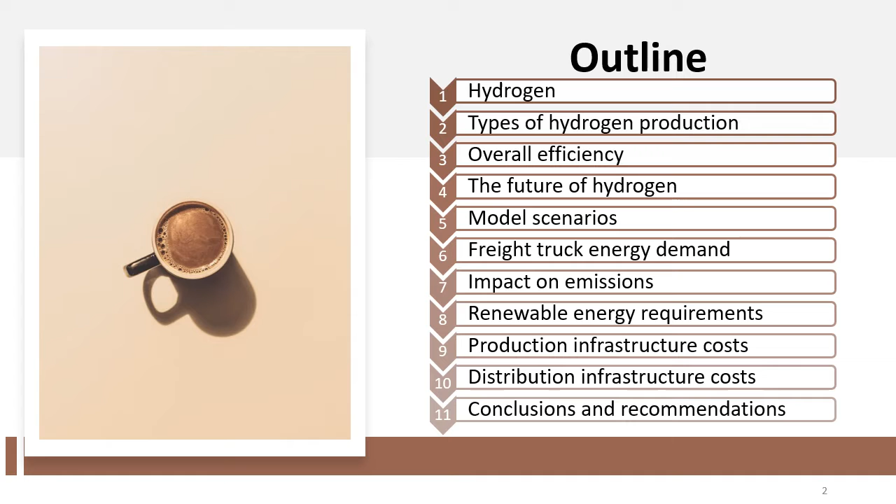Let's begin with some basic hydrogen background from an energy perspective. Hydrogen is a carbon-free energy carrier. It is 3 times more energy dense by weight than conventional hydrocarbons, but 4 times less energy dense by volume. It needs to be compressed to 790 times atmospheric pressure to have an energy usable volumetric density, which is an energy intensive exercise. It can be liquefied at negative 283 degrees Celsius at atmospheric pressure, which is an even greater energy intensive exercise. But most importantly, the production of hydrogen utilizes energy carriers as feedstocks.

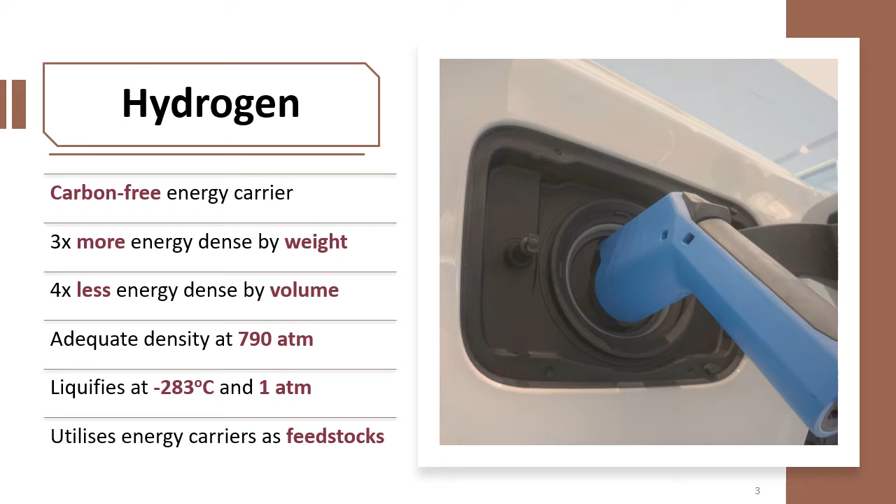Among the different types of hydrogen production methods are green hydrogen, produced by electrolysis using electricity from renewable sources; black hydrogen, extracted from natural gas using steam methane reforming; turquoise hydrogen, produced by the thermal splitting of methane; yellow hydrogen, produced by electrolysis using grid electricity; and brown hydrogen, produced by gasification using coal. For zero carbon emissions, the focus will therefore be on green hydrogen.

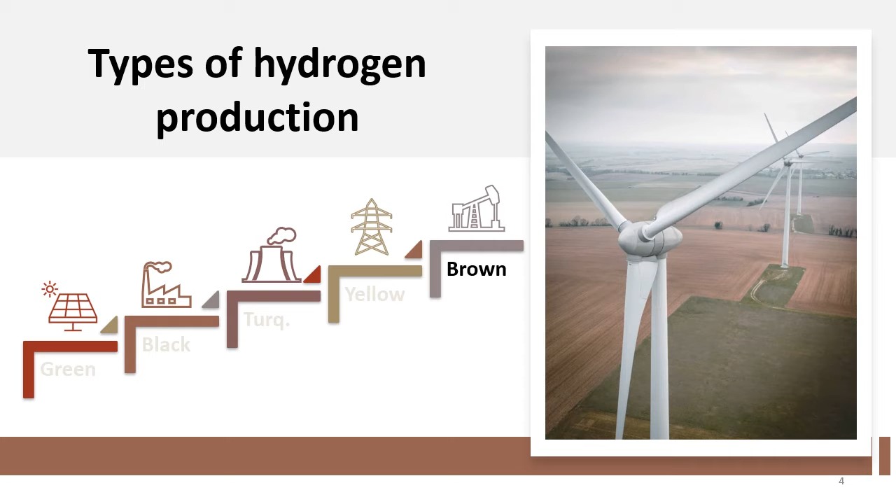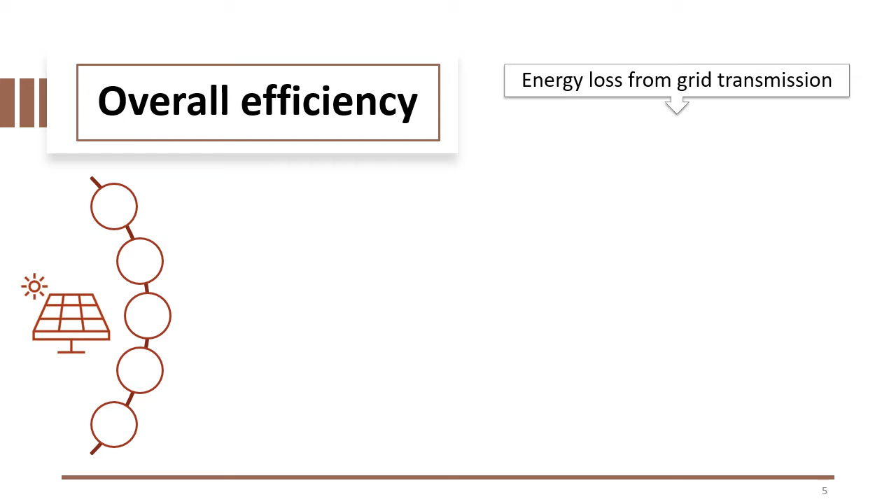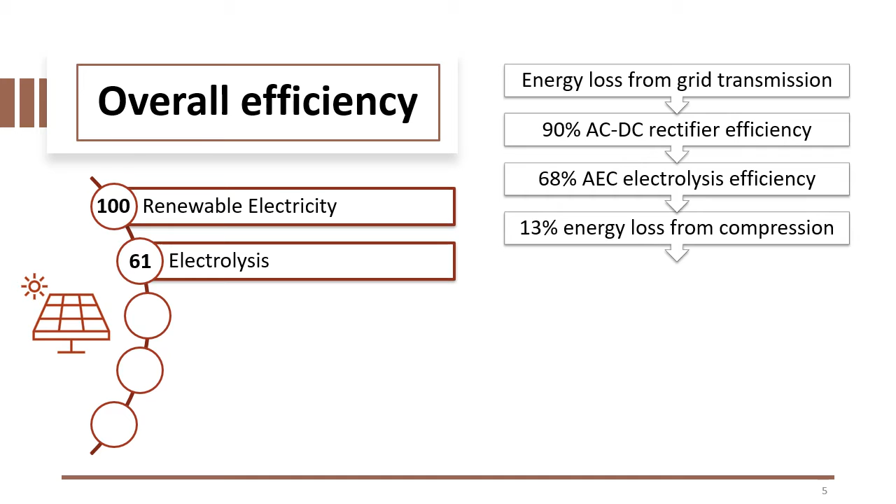The process begins with a slight energy loss from grid transmission to yield 100 kilowatt hours of renewable AC electricity. It is converted into DC electricity by a 90% efficient rectifier before entering the 68% efficient alkali electrolyzer cell, giving 61 kilowatt hours of energy in the form of hydrogen. The hydrogen is then compressed to a usable density, losing 13% of energy to heat, resulting in 53 kilowatt hours of energy in the form of compressed hydrogen for distribution.

The compressed hydrogen enters a 60% efficient fuel cell and leaves as 32 kilowatt hours of battery storable DC electricity. A 90% efficient inverter then converts the DC electricity from the battery to AC electricity, which powers the 95% efficient AC motors, giving you 27 kilowatt hours at the wheel for a 27% overall efficiency.

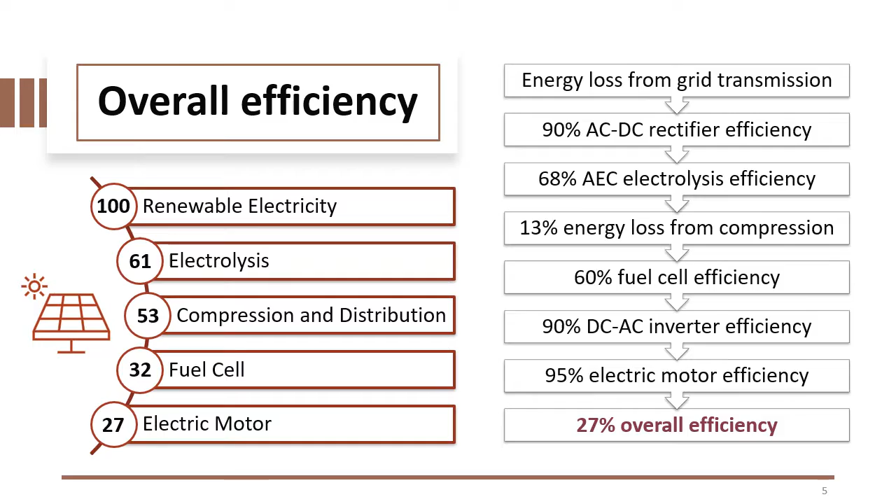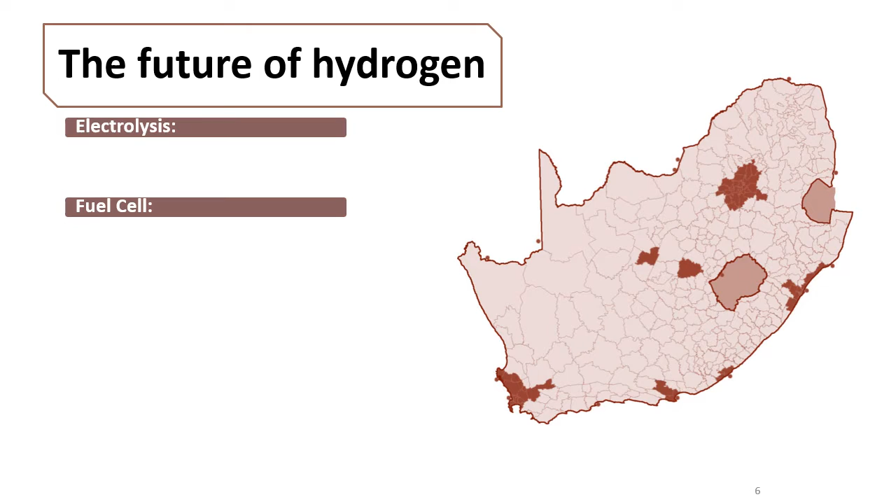The future of hydrogen for South African road freight hinges on 3 major sections: electrolysis efficiencies, hydrogen fuel cell advancements, and curtailing distribution losses. Starting with electrolysis, transitioning from an alkali electrolyzer cell to a solid oxide electrolyzer cell increases the 68% electrolysis efficiency to 84%.

Solid oxide electrolyzers are currently at a technology readiness level of 6, awaiting commercial availability, but can be expected to be implemented by 2045 to increase the overall efficiency from 27% to 34%.

Next, hydrogen fuel cell advancements can be made to approach a 90% theoretical efficiency. If such improvements are made, we can expect the overall efficiency to increase from 27% to 41%. When combining improved electrolyzer efficiencies with advanced hydrogen fuel cell technology, an overall future efficiency of 51% can be expected.

Finally, distribution losses are to be considered, as 10 to 40% of energy can be lost in the transportation of hydrogen, which can decrease the future overall efficiency from 51% to 30-46%. These losses can be curtailed by comparing central and distributed production facilities.

Central production facilities decrease production costs due to increased quantity, but increase distribution costs due to increased transport distances. Distributed production facilities are likely to increase production costs due to decreased quantity, but decrease distribution costs due to decreased transport distances. Freight hydrogen fuel cell vehicles have the potential to cover a range of 1,600 kilometers.

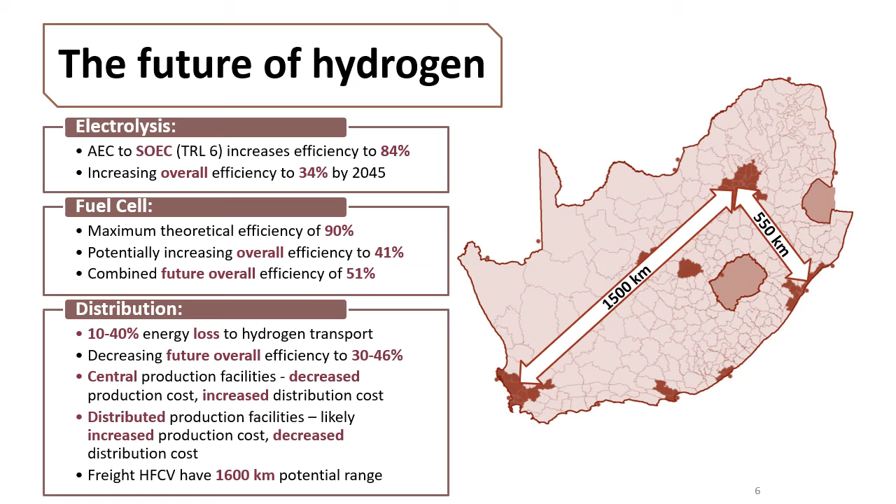The following two model scenarios are based on freight demand estimations imposed into the South African Times model. The South African Times model generates different scenarios of hydrogen applications, which are aggregated to determine the South African demand for hydrogen approaching 2045. The model covers hydrogen applications in light, medium, and heavy commercial vehicles.

Scenario 1 estimates that hydrogen replaces 5% of freight truck diesel by 2030 and 25% by 2045. Scenario 2, on the other hand, estimates that hydrogen replaces 20% of freight truck diesel by 2030 and all of it by 2045.

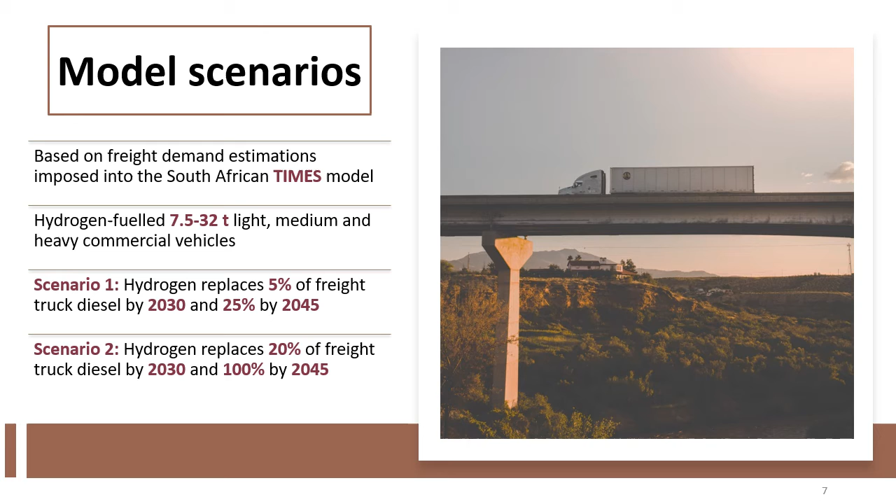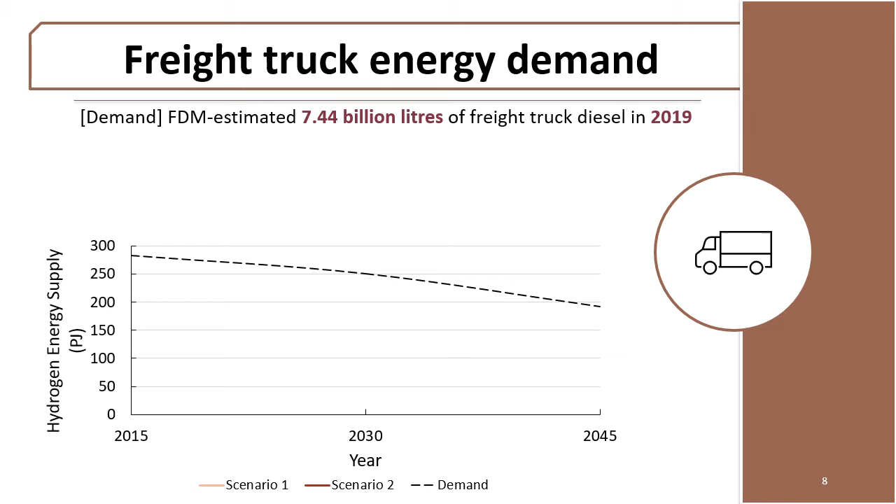Looking at the freight truck energy demand, it is estimated that the total energy required by freight trucks would be 192 petajoules by 2045. This is based on a freight demand model, which estimated that a total of 7.44 billion liters of diesel was used by freight trucks in 2019.

Scenario 1 would leave 155 petajoules remaining to be covered by diesel in 2045. Conversely, Scenario 2 estimated that hydrogen meets the total freight truck energy demand by 2045.

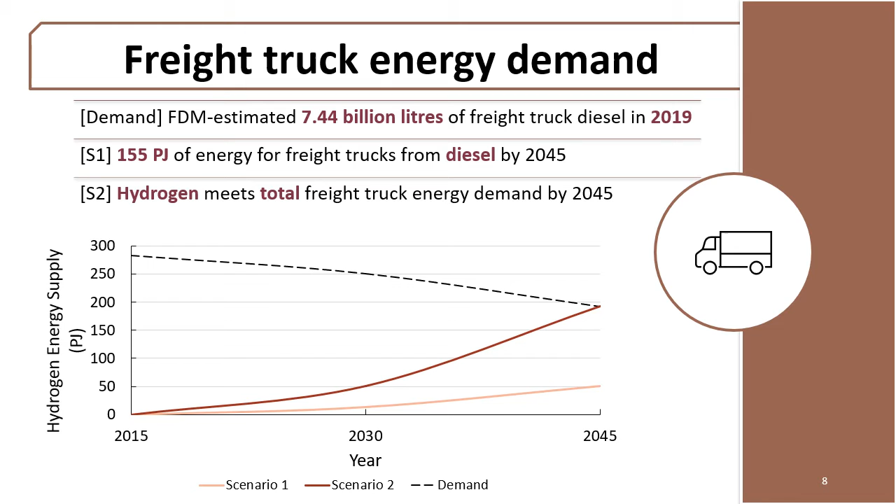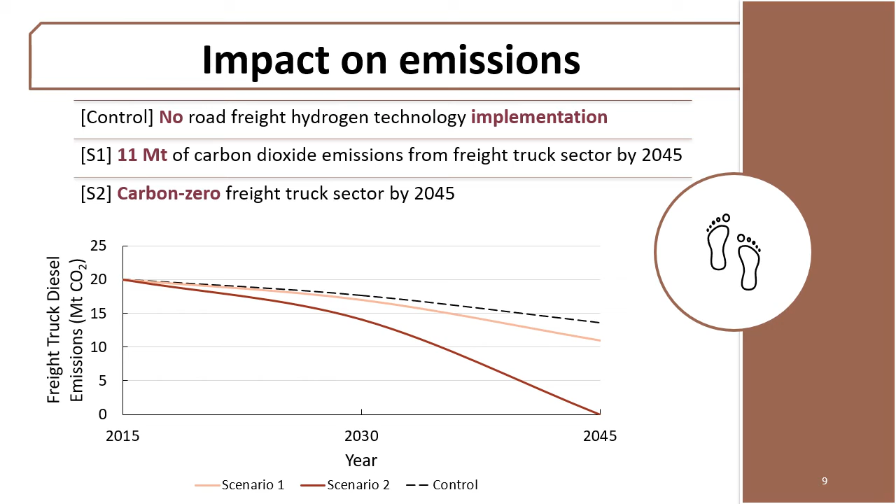Looking at the subsequent impact that these scenarios have on the carbon dioxide emissions from the freight truck sector, the control scenario provides a reference and assumes that no road freight hydrogen technology is implemented. Scenario 1 leaves 11 megatons of carbon dioxide remaining by 2045, while Scenario 2 estimates a carbon zero freight truck sector by 2045.

To determine the renewable energy requirements necessary to realize either scenario, a 1-to-1 ratio of onshore wind energy to solar PV energy production is assumed. The wind farms are expected to operate on an annual capacity of 35%, while the solar PV farms are expected to operate at 25%. Implementing these conditions allow for the following renewable energy production, with the current wind and solar PV capacity as a reference.

Assuming all current onshore wind and solar PV energy production is shifted towards hydrogen production to meet this scenario's demands, the current wind energy capacity should increase threefold for Scenario 1 and 12-fold for Scenario 2 by 2045. Similarly, the current solar PV energy capacity should increase 5-fold for Scenario 1 and 19-fold for Scenario 2 by 2045.

Including the current onshore wind farm area, the total onshore wind farm area required to achieve this capacity increase should be 1,720 square kilometers for Scenario 1 and 6,440 square kilometers for Scenario 2 by 2045. Similarly, the total solar PV area required should be 290 square kilometers for Scenario 1 and 1,090 square kilometers for Scenario 2. For context, this would mean that roughly a fifth of the Netherlands, or about 2/5 of Gauteng, should be covered in wind and solar farms to meet the renewable energy requirements for a carbon zero freight truck sector by 2045.

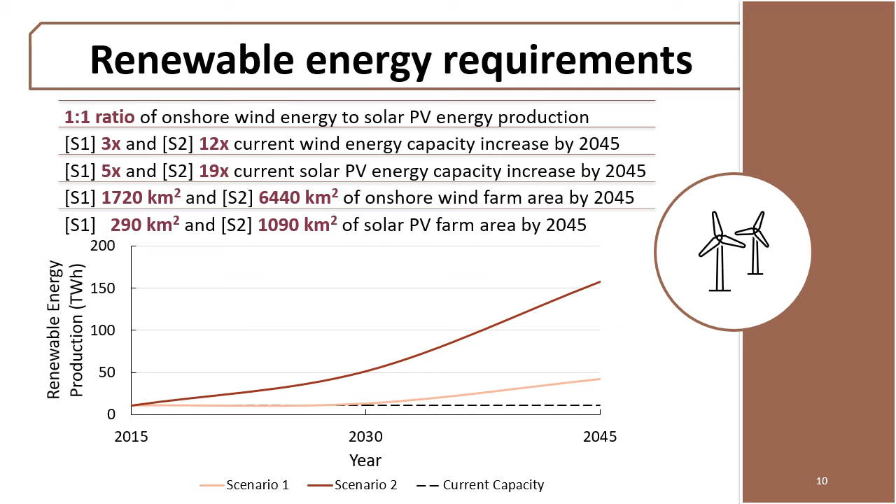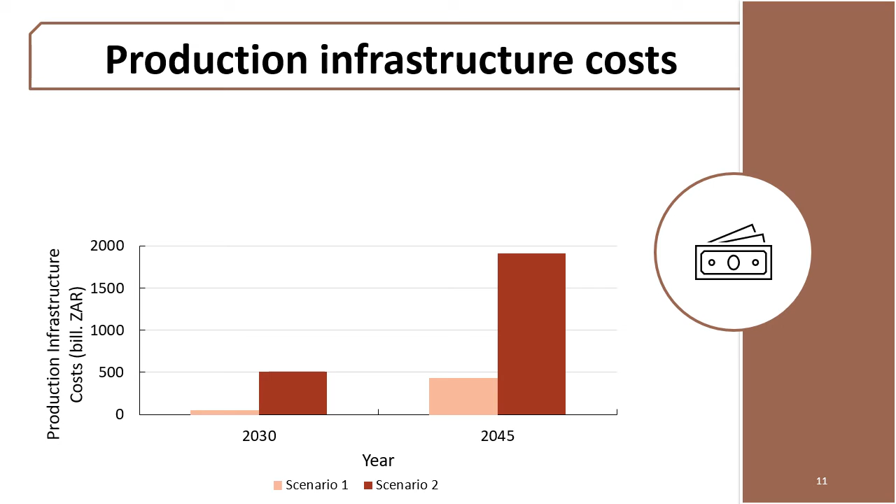Looking at the associated infrastructure costs to meet both the renewable energy requirements and electrolyzer production requirements, Scenario 1 requires capex expenditure of 49 billion rand by 2030 and 432 billion rand by 2045. Similarly, Scenario 2 requires 509 billion rand by 2030 and 1,909 billion rand by 2045.

Next, electrolysis infrastructure is costed according to a capex per kilowatt basis for alkaline electrolyzer cells by 2030 and solid oxide electrolyzer cells by 2045. The infrastructure cost required to produce the associated hydrogen adds up to an average 100 rand per kilogram produced from the electrolysis infrastructure, assuming the electrolyzers operate on an annual capacity of 40%. In total, the infrastructure cost required to produce the total amount of hydrogen required adds up to an average 419 rand per kilogram of hydrogen to be produced.

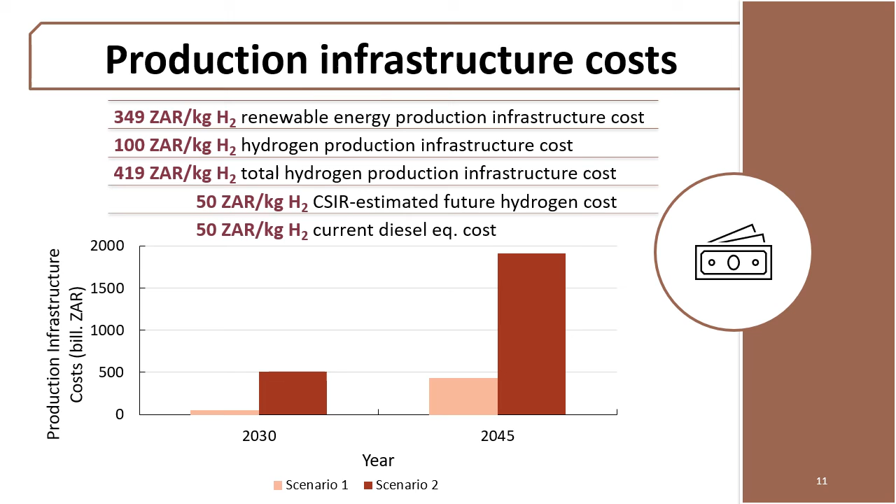Interestingly, the CSIR estimated that green hydrogen is estimated to cost around 50 rand per kilogram. Currently, diesel would cost around 50 rand to get the equivalent energy output in the form of 3.2 liters of diesel per kilogram of hydrogen. Therefore, for equal transport effort, a hydrogen solution would cost roughly the same as a diesel solution in 2021.

Finally, the distribution infrastructure cost required to transport the hydrogen can be calculated according to a per energy basis estimated by the model. Scenario 1 requires 0.8 megatons of hydrogen to be transported compared to Scenario 2's 3.1 megatons by 2045. As such, Scenario 1 requires capital expenditure of 34 billion rand by 2030 and 136 billion rand by 2045. Similarly, Scenario 2 requires 135 billion rand by 2030 and 508 billion rand by 2045.

Therefore, the infrastructure cost required to distribute the hydrogen adds up to 166 rand per kilogram of hydrogen to be transported. For reference, the diesel equivalent distribution infrastructure cost per kilogram of hydrogen transported adds up to 4 rand per kilogram. The significant difference is due to the low infrastructure cost per distributed diesel energy estimated by the model, which can mostly be attributed to hydrogen's comparatively low energy density by volume, resulting in high distribution energy losses.

Ultimately, you can implement infrastructure to distribute 3 times the mass of diesel for 1/40th the cost of the energy equivalent in hydrogen infrastructure.

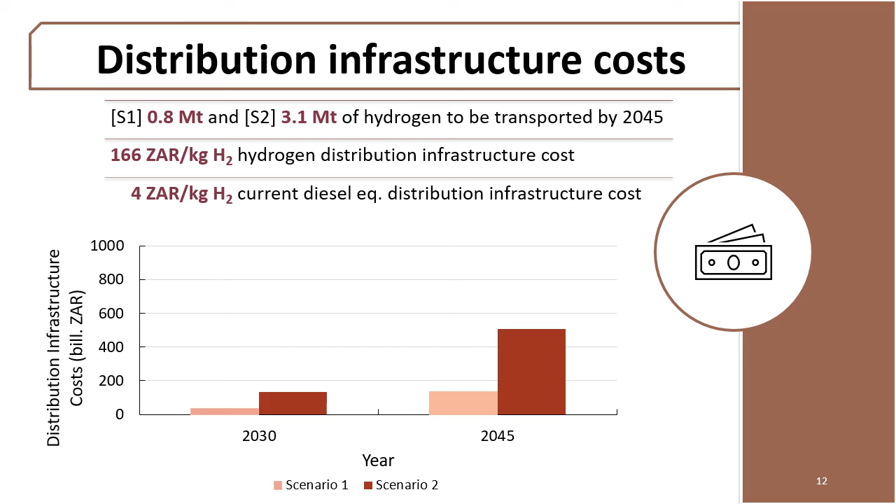To conclude, the overall process efficiency can increase from 27% to 34% by 2045, and can potentially get to 51% thereafter. The land area required for the renewable energy infrastructure is significant. However, South Africa has extensive land area available for applications of onshore wind and solar PV resources. The land area to be covered by renewable energy infrastructure is less than 1% of the South African land area available. Land areas that cover less than 2.5% of the total land area available are not considered significant enough to disturb the remaining areas.

The future cost of hydrogen is estimated to roughly equal the current cost of diesel to provide the equivalent energy. However, hydrogen distribution infrastructure is 40 times more expensive than its energy equivalent in diesel. Ultimately, a fair argument can be made for hydrogen utilization in the battle for a carbon zero freight truck sector, both in its future efficacy and associated costs.

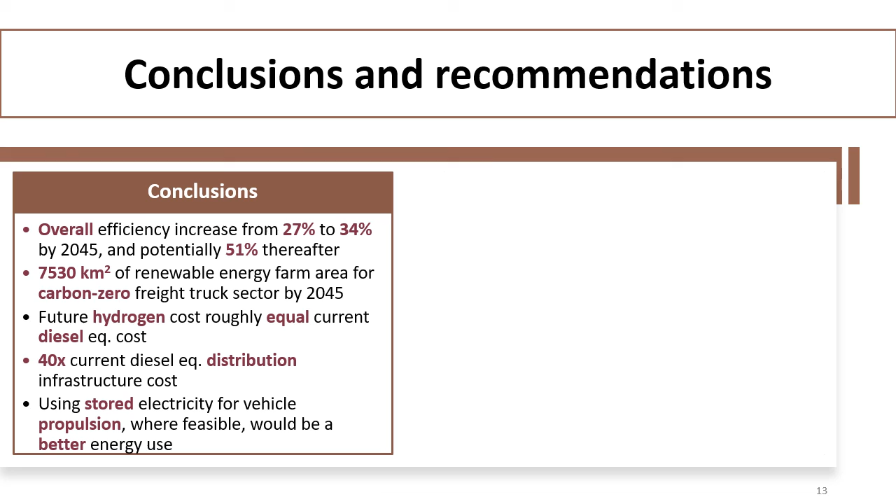Regardless of whether or not hydrogen is used, stored electricity should be used for vehicle propulsion, as this would be a better energy use than coal supplementation.

It is recommended to get solid oxide electrolyzer cells to commercial availability as soon as possible. Next, the hydrogen fuel cell should be optimized, potentially through the improvement of current platinum catalysts, of which South Africa has platinum group metal reserves.

Next, the central and distributed production facilities should be compared to minimize distribution energy losses, along with determining the optimal placement of these facilities on major corridors. Finally, and most excitingly...

Hydrogen storage mediums, such as liquid organic hydrogen carriers, can be utilized to capture produced hydrogen for decreased distribution energy costs. The hydrogen can then be extracted and utilized as necessary to offset the potential waste of surplus renewable energy, increasing both the efficacy and robustness of future hydrogen applications.